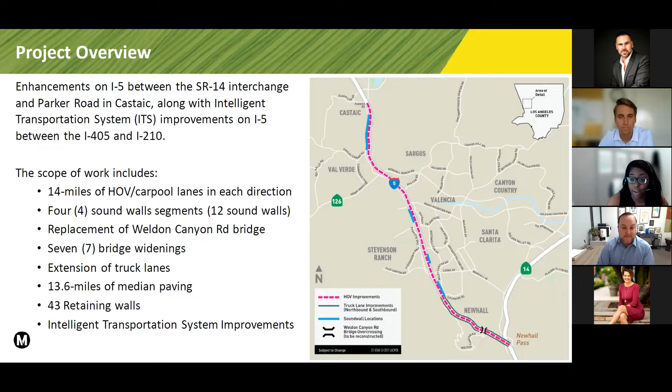Those 4 sound wall segments I mentioned are divided into 2 sound walls along the southbound and 2 sound walls along the northbound. On the southbound end, those 2 sound walls are located north of Hasley Canyon Road and from Magic Mountain Parkway to Valencia Boulevard. On the northbound end, it's from south of McBean Parkway to north of Calgrove Boulevard.

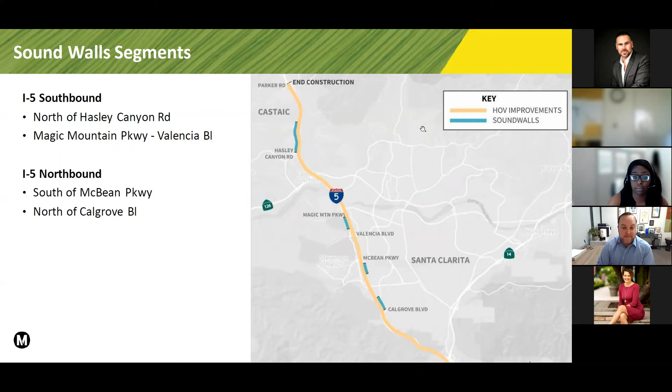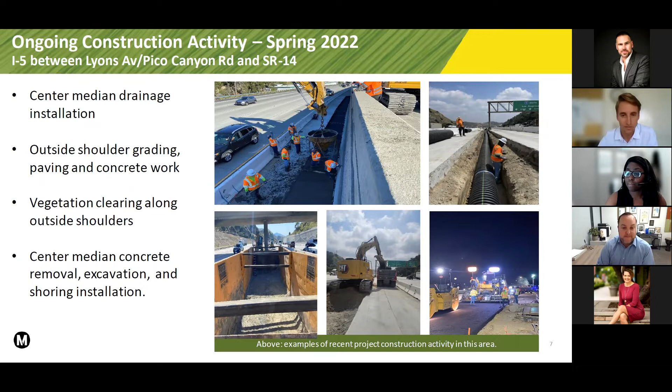In addition, up in the north end of the project, between about Rye Canyon Road and Parker Road, a similar construction process has begun. We're mainly staged in the center median in this stretch of the project, starting to set up K-rail and those work zones. We've started excavation, grading, and started to install some of our new drainage pipe in that area, just generally getting ready for center median construction.

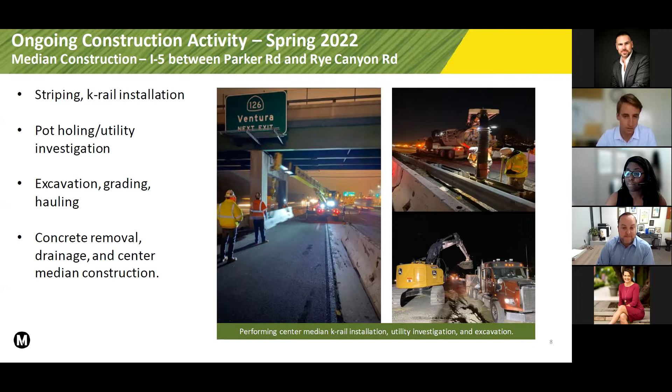In addition, we've had vegetation removal ongoing. This is fairly typical of any major freeway project, having to clear vegetation and shrubs along the outside shoulders and potentially anything in the center median. So we've started between Calgrove and Weldon Canyon. You probably noticed the areas along the outside shoulders starting to be cleared. We'll be moving to Rye Canyon Road as well, a little further north on the project, where we're going to get into construction activity too.

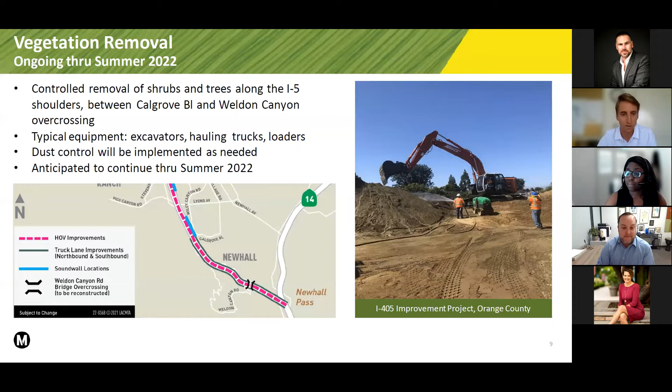Upcoming activity falls into three main categories of construction, shown here as rows. Center median construction is the top row, starting with excavation and drainage work, new barrier, and new permanent concrete pavement. Bridge construction and shoulder work make up the second row. We've started construction of the new Weldon Canyon Bridge, which is the one bridge fully removed and reconstructed on the project, as well as other locations where we widen the 5 over an existing roadway or creek. We'll look at those locations, and finally, sound wall and retaining wall construction.

So we'll look at what those activities will look like, some of the first locations we're starting on the project this summer, and also the general sound wall locations in more detail.

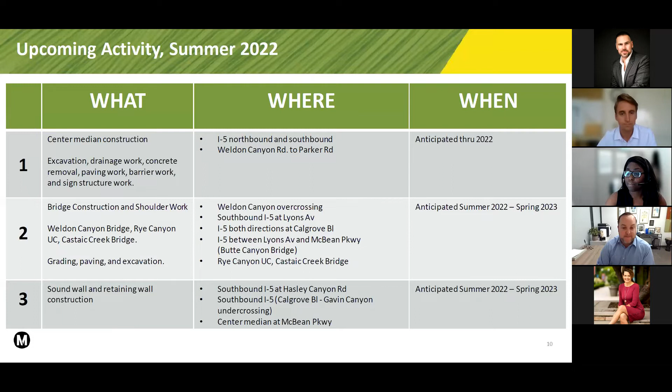This is Weldon Canyon Bridge. That top photo is a Google image as it looks now. There's been some more construction activity starting there, but the plan is to construct the new bridge and then remove the old bridge after the new bridge is open to traffic and substantially complete. The area where the new bridge is being constructed is in the foreground of those sloped areas on the outside shoulders and from the center median.

We've started the center median construction. You can see in that middle photo, on the bottom panel, the current center median at Weldon Canyon, where we've started to excavate and install shoring. You'll also start to see staging and more construction from the outside shoulder. On the right of this panel is the start of typical bridge construction, abutment construction, which are the concrete blocks on the outside shoulder that connect to the bridge superstructure. This is all starting now and will be ongoing for about the next year.

One of the big activities coming up at the end of the summer is installing falsework, the structure we build that spans up and over the freeway to allow us to place concrete and rebar and actually build the permanent bridge. That's coming up at the end of this summer.

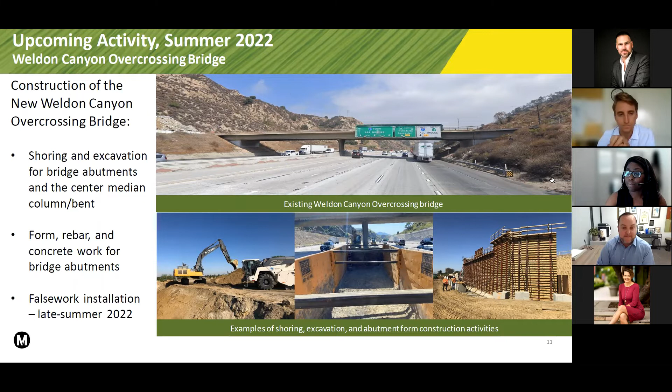Now a couple other bridge locations, moving south to north, a little further north from Weldon Canyon. This will be typical of most bridge locations on the project, where for the future HOV lanes we need to expand and widen the structures of the I-5 bridges where they run over a roadway or a creek. This is between Lyons and McBean, with the Vista Valencia golf course on the right. Construction for expanding these two I-5 bridge structures will happen from the outside lanes and inside lanes in both directions, and will be staged from down below near the creek.

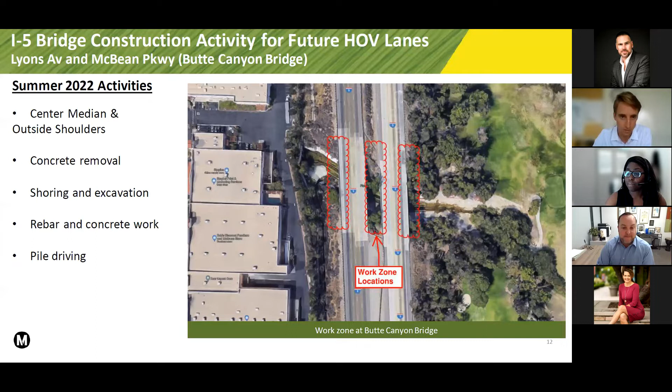We actually have to build new foundations and widen those structures, so we have some driven steel piles for the new foundations. You'll start to see the rebar, concrete, and formwork coming up from the bottom, at a below grade level. This is one of the locations we're planning to start this summer.

In addition, we're undertaking a very similar construction process at Rye Canyon Road. This top photo is another Google image, showing Rye Canyon Road standing at the old road, looking eastbound. It's a very similar process, we will have to expand this structure for the future HOV lanes. These bottom photos, left and right, show the bridge column construction for the freeway bridge, starting with the rebar, concrete, columns, and forms.

We will also place precast concrete girders, shown in the bottom right photo, for the main horizontal support beam of the I-5 bridge. We'll be staged on either end of Rye Canyon Road. We have some work coming up this week, and there's information online if you're interested, to restripe part of Rye Canyon Road, place some K-rail, and get ready for starting that construction.

Moving into the vegetation clearing near the I-5 bridge, then the foundation work and eventually the bridge work on the I-5 bridge. This work is starting this summer and will continue for months to come.

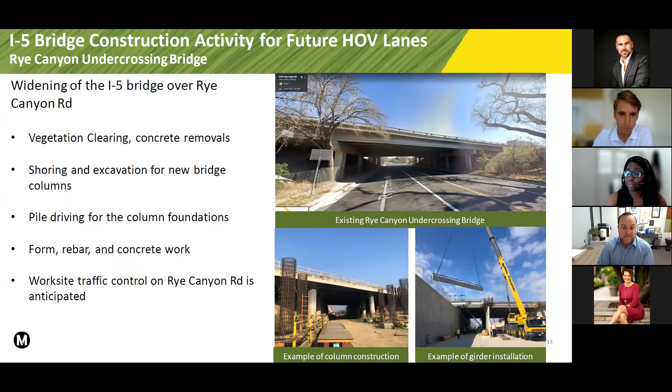Moving away from bridges, to overhead signs on the freeway. As part of this whole freeway renovation, we will be replacing overhead signs. During construction, as we build the center median and pave, we'll need to remove the existing overhead signs and replace them with temporary orange signs with similar messaging, so it's clear where the exits and connectors are, while taking down the permanent green signs. This is usually done at night in a one-night operation, where we'd close lanes or potentially a full direction of the freeway during off-peak hours, remove the sign, and reopen the freeway by morning. These are some example locations coming up, which you'll see if you're following the project online.

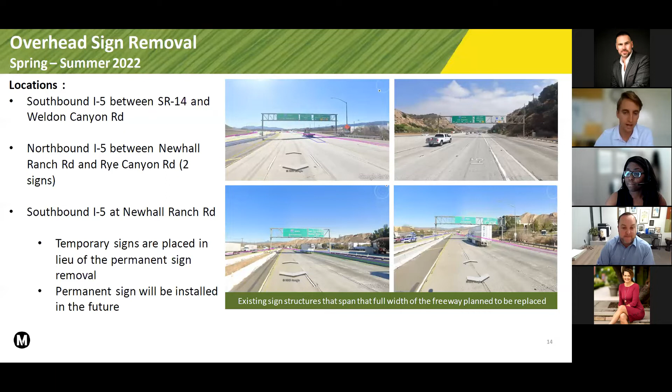Now into the last construction category: wall construction. We have multiple retaining wall locations starting this spring and summer. Our first two locations: one is between Calgrove and the Gavin Canyon undercrossing, at the bottom left of the image, where the old road crosses under I-5, with a retaining wall running that whole stretch starting construction. We also have a center median retaining wall, shown on the right, between the Butte Canyon Bridge location, around Pico Lyons, all the way up to McBean, continuing north past McBean as well.

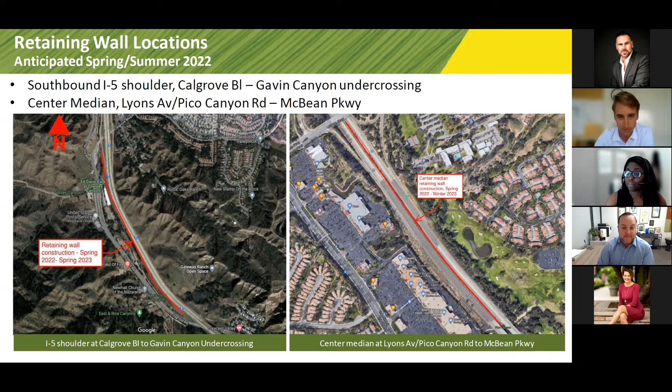This is the next retaining wall location we're planning to start this month, before the end of the month, between McBean and Valencia in the center median. Starting with excavation and hauling of material, and then you'll start to see the actual foundation and wall come up.

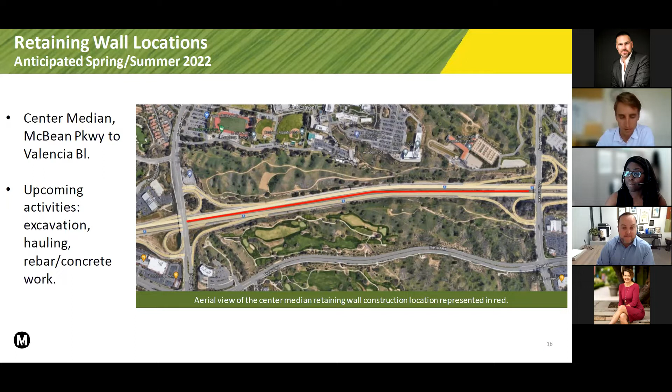We also have sound wall locations down at Calgrove, along northbound I-5, both along the on-ramp and just north of the on-ramp. This will start a little later in the summer—it's our next location after Hasley—and will continue through the end of the year.

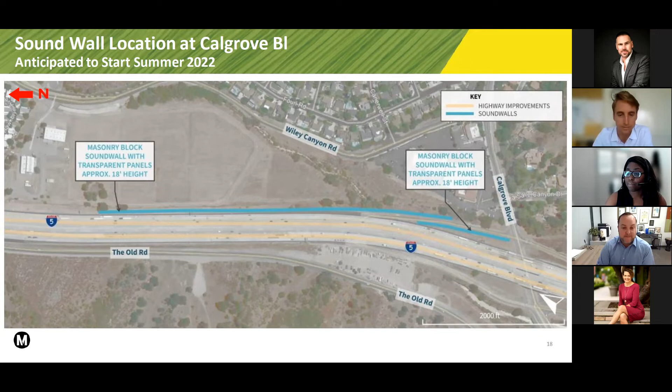In addition, we have another sound wall along northbound I-5 leading up to McBean Parkway, almost as you enter the off-ramp for McBean Parkway next to Vista Valencia Golf Course. This is later in the project. With staging on the freeway, we have different phases and stages of striping. Once we advance the center median construction to a certain point, along with some bridge locations, we can switch traffic and set up K-rail in areas to reach these sound wall locations. That's coming up late 2023, early 2024.

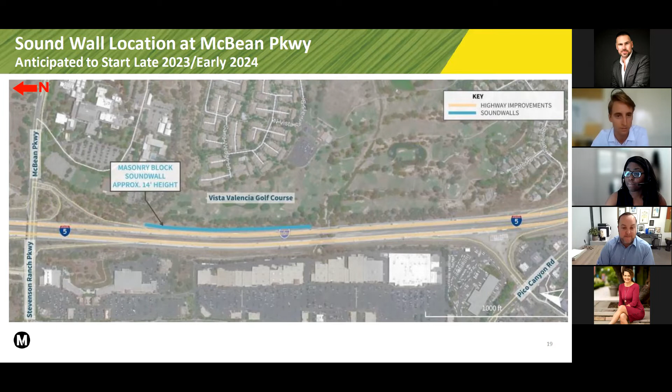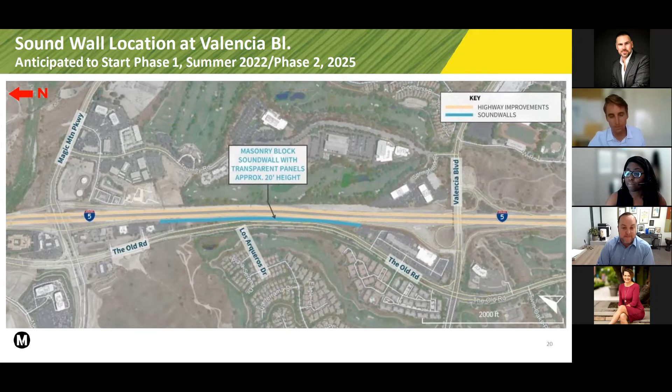And finally, we also have a sound wall location southbound I-5 between Magic Mountain Parkway and Valencia. This will be built in two phases. We'll build about half of it starting this summer, in 2022, 2023, building the first phase. Then the second phase is at the end of the project, in 2025 and 2026, for those same reasons of freeway staging and availability of space. The biggest challenge on the project is maintaining traffic through the corridor safely while also renovating and rebuilding, so some areas get broken up into different stages, and this is one of those locations.

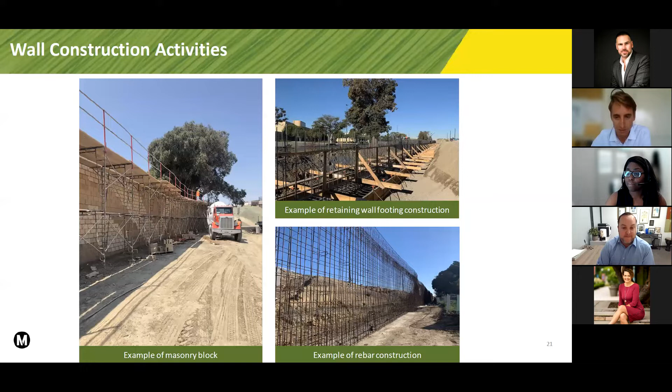Speaking of foundations, these are the typical foundation construction for both the sound walls and the retaining walls. Some of that pile driving of steel into the ground for the foundations, that's an example on the left of what that will look like. That is for bridge construction, but it is similar to what we'll be doing for some of the retaining walls, such as down at Calgrove and in the center median. For the sound walls, those are typically concrete in drilled hole foundations, so we auger a hole into the ground, drill a hole, and then place rebar and concrete to build the foundation for the sound walls. That's an example of what that sound wall foundation construction looks like on the right.

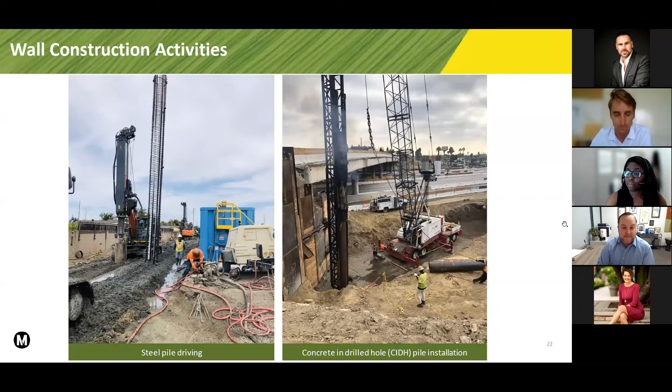That's really the construction update. So now moving into some of the support parts of the project and mitigations.

Every major infrastructure project, major metro project has a noise monitoring and mitigation program and plan. So we as a contractor are required to maintain a plan, developed by a qualified acoustical engineer. That plan includes noise monitoring, reporting, and mitigation and adjustment if needed. It also identifies sensitive areas, mainly residential areas but also business areas that would be sensitive to noise that we need to be cognizant of, so we're able to take more precautions and monitor as needed in those areas. And as Soroya will mention as well, coordinated responses to public complaints - that's where Soroya and I come in to make sure we're getting messages out to the field crews, the project management, and working with members of the public on what's happening on the project and what we can do to try to mitigate some of these issues.

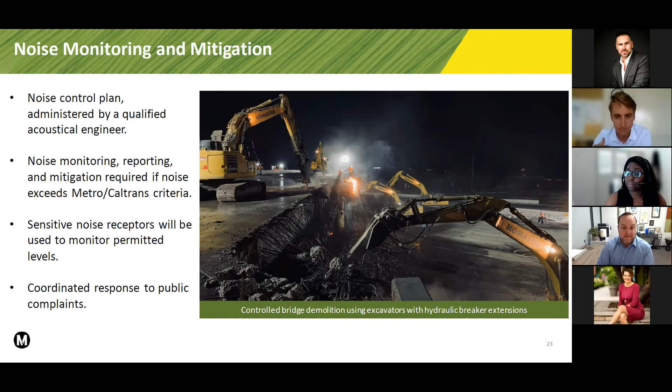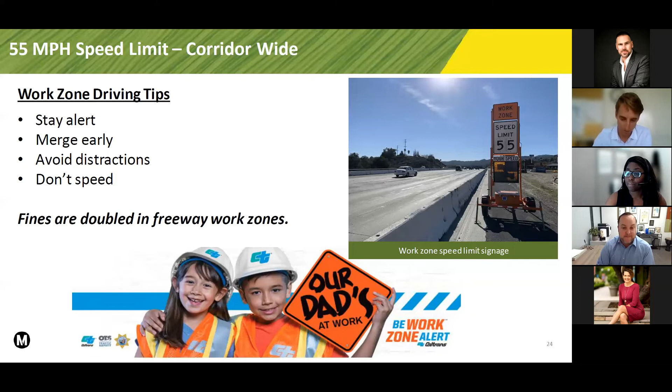Moving away from noise and into traffic, the whole corridor is now a 55-mile-an-hour speed limit zone. As more construction starts, that becomes a critical safety thing for both the general public and for our workers out there on the freeway. We do recognize that the flow of traffic sometimes is greater than 55, so as close to adhering to that as possible is very much appreciated. I try to go about 60 when I'm going through the corridor, of course in the slower lanes, but just a reminder to everyone that the whole stretch between Parker Road and SR 14 is a 55-mile-an-hour zone.

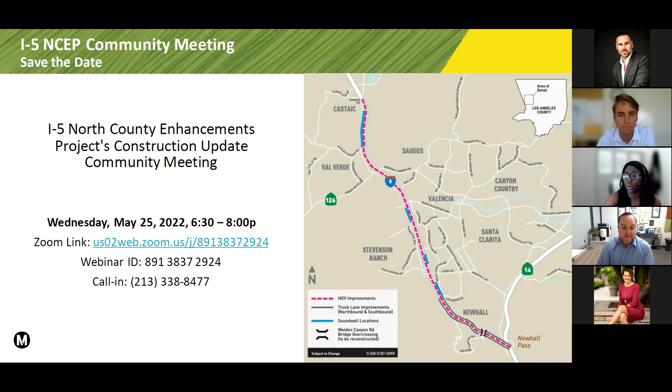So I'm going to close it off and open it up for any questions or concerns that you guys would love to ask Billy and I.

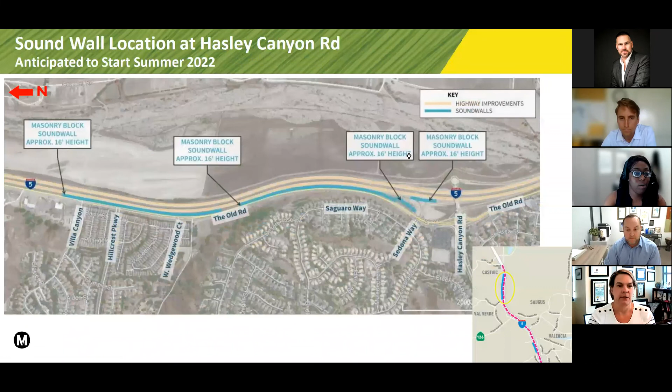If people want to get more breakdowns and details, they can get on your mailing list by emailing the project email, or you can email me and I'll be happy to add you to our stakeholder list.

The best way to stay up to date will definitely be on that email distribution list. We send a weekly construction notice giving activities for the upcoming week, and as part of our role, we are supposed to inform the public at least 72 hours before any construction activity. So the website and being on the email list will probably be the best way to know what's happening in the project and what activities are upcoming.

Great, and of course the website is also good, it has a lot of these overviews in it. Exactly. So the other question, maybe for Billy,

as you look at these broad stages, when does each most affect travel? Like when we get to stage 3 of retaining walls, is that likely to include lane closures and or lane movement? Or when are we most likely to see closures in this broad scope?